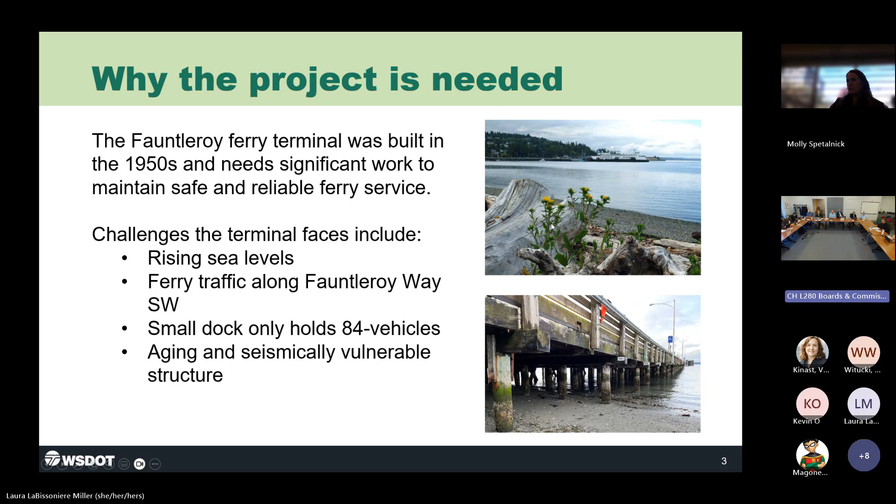We started this project just before COVID. I remember my boss telling me, we're not going to take 10, 20 years to design this project like we did your Mukilteo project. No, we're going to do this one really quick. I just nodded and said, sure, we will, because I know things happen. I didn't know COVID was going to happen. I didn't know the West Seattle Bridge was going to start cracking. I didn't know all these other things. But things just happen on all these projects. As long as I've worked, stuff happens.

So we want to go quickly, and we can only go as fast as we can go.

Before COVID happened and we began the project, we put this long range plan together, and this is what the team aims at. We figured out what vessels were going to be assigned to the route in 2040. We did our traffic predictions of what traffic would be like in South Kitsap, over in Vashon, and in West Seattle. Then we took that information and gave it to the design team and said, this is what you're aiming at—not 2050, not 2090, 2040, just aim there. Things get fuzzy if you look further ahead than that, even though the structures we're putting in here, made of steel and concrete, are going to last 50 to 75 years.

Our design is based on the 2040 long range plan.

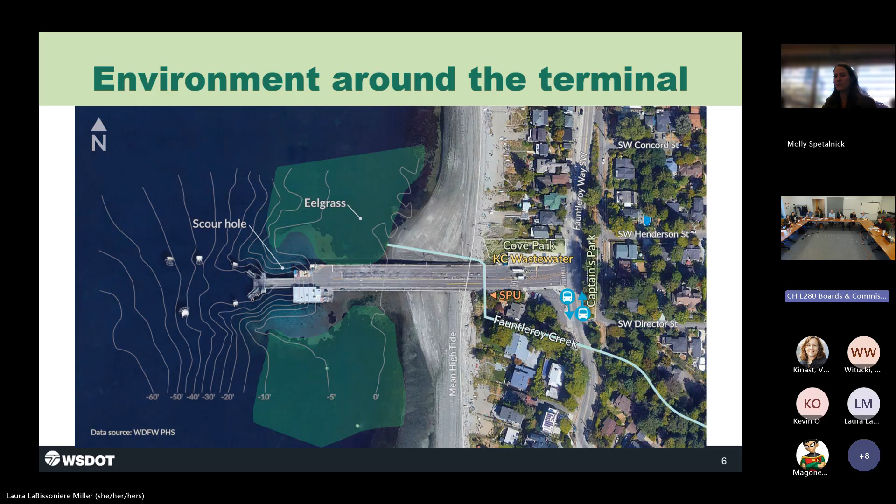And we have nice homes around there. It's a little quiet area. I mentioned Cove Park is right there on the opposite side of the street, the east side of the street, up on top of the bluff. Captain's Park. And this one, and I'll turn it over to Laura.

Thanks, Charlie, for setting the stage and the context. And we are going to get into the alternative that Washington State Ferries has selected to move forward.

But before that, I wanted to speak a little bit about the community engagement process so far. Charlie mentioned that this route serves 3 communities, so 3 million passengers who travel through the Fauntleroy Ferry Terminal each year. Those communities are very different from one another and have really different needs. So we're serving Vashon Island, which is an island dependent entirely on the ferry system to get to medical appointments, work, places that they need to go. They rely on that service. And we hear from them loud and clear. We hear a lot from them and do a lot of work with the community.

We're also serving the South Kitsap Peninsula, so an increasingly diverse area, a lot of people moving out to that area. We really see the ridership increasing from South Kitsap Peninsula and coming into Seattle, kind of a split between south and north. So they're coming to Fauntleroy, but they're going in all directions.

And then, of course, as Charlie mentioned, the environment around the terminal. This is in the middle of a residential neighborhood. This is the only terminal in the system where the connection is a local arterial. So you think about the neighborhood and people currently that have traffic coming along in front of their homes. There's driveways along Fauntleroy Way, and this terminal has really become part of the fabric of the community and a part of the neighborhood.

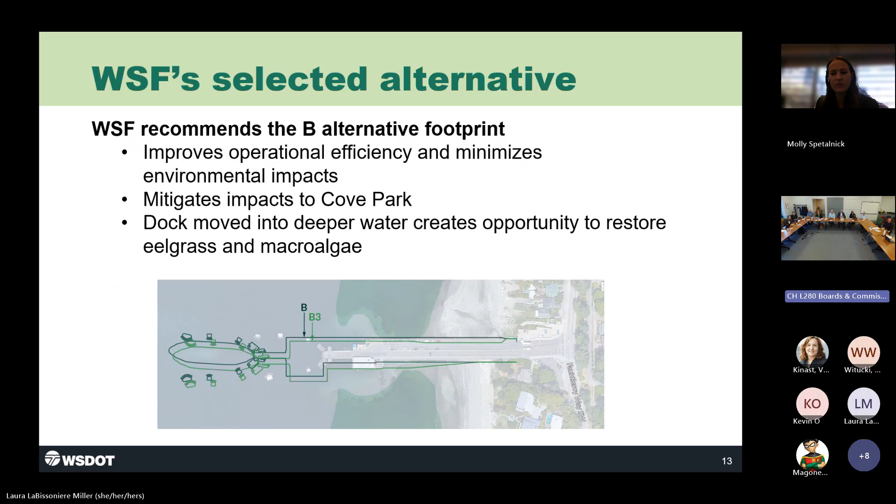In general, we're moving forward with the footprint that best improves operational efficiency, as well as some other factors, which I'll get into in a moment.

As I mentioned, those B alternatives we're basing the footprint on are fairly similar. By the time we get to level 3 screening, a lot of the screening criteria and performance factors we were looking at are all met across all of the alternatives. Level 1, level 2, we've already screened out a lot of the things that have critical flaws.

So all of the alternatives we looked at, and certainly what we're progressing forward into NEPA, meets some of these key needs: to replace the dock at the same location, and accommodate the number of vehicles requested by the design manual, in a combination of on-dock and shoulder holding up Fauntleroy Way as it is currently.

The new design will meet the seismic design standards, accommodate sea level rise, and be designed to have enough space for large trucks to safely navigate. At the moment it's quite tight—the lanes are narrow, and when large trucks come through it can be a maneuvering challenge for operations and drivers. We'll have wider lanes that give more space for various modes of moving across the trestle.

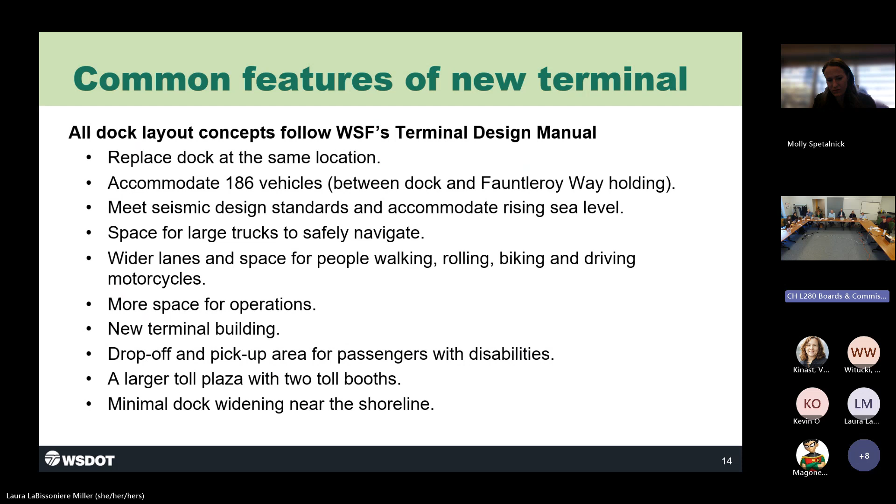It gives more space for operations, a new terminal building, drop-off and pick-up areas for passengers with mobility challenges, and a larger toll plaza with two toll booths. Again, minimizing any widening at the shoreline prevents impacts to that nearshore environment Charlie was mentioning.

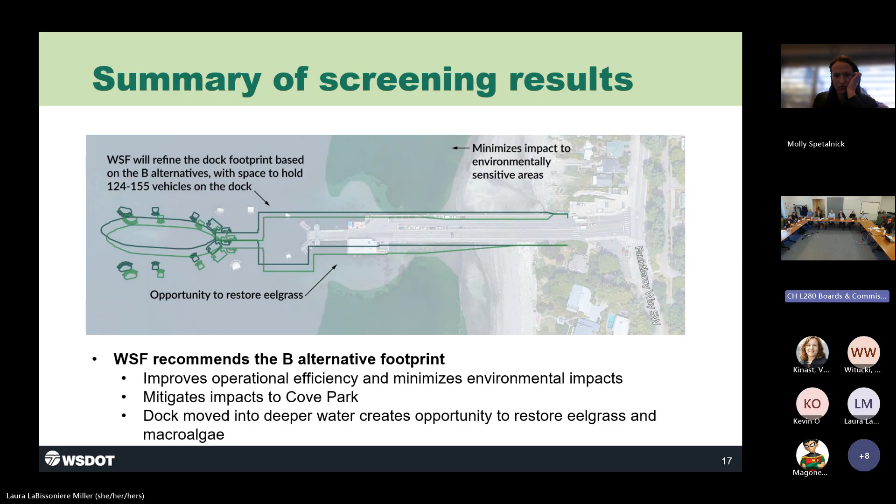That's based on all of the screening criteria we just looked at, but also included traffic analysis. We ran VISSIM models of each of these alternatives, which is a traffic model, just to see how vehicles of various modes load and unload, also considering the lane configurations and how they sort on the trestle. Yes, that's some of the key features of what we're progressing.

As part of this, as Charlie mentioned, we identified the opportunity to improve the intersection at the terminal entrance where it connects to Fauntleroy Way Southwest. As Laura mentioned, it's an arterial street, with neighbors along there whose driveways drop out into Fauntleroy Way. Currently that's an unsignalized, uncontrolled intersection. WSF has a uniformed police officer out there during peak periods to help direct traffic, since people leave the terminal wanting to go both left and right, north and south. There are a lot of school kids and buses that come through there.

So we'll be installing a signalized intersection beginning later this year. That design is currently about 60%. We're working closely with Washington State Ferries, their WSDOT traffic contingent, SDOT, and various SDOT departments. It will be a single signal pole with a couple of mast arms. We've designed it to avoid the hillside you see there with Captain's Park on top - that was one of the key aims of the project, to avoid any impacts to parks. There are also culturally sensitive areas around here, so we're minimizing that.

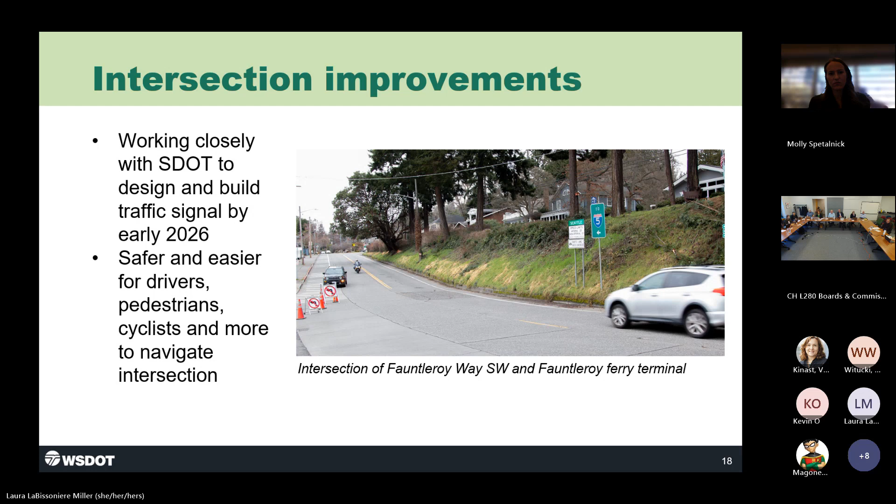I'll add that the intersection is owned by the city and will be managed by the city. We're using their design criteria and they're reviewing our submittals, just to fit in with how the city wants to manage traffic along Fauntleroy Way.

On the modes, the trestle really gets longer as opposed to wider, but the little widening has to do with the 2 bike lanes we're adding. Currently, the bike lanes go in and out of the exit lanes, and sometimes people use the exit lanes to drop off a walk-on who needs to get to the front. So there's cars going back and forth in that exit lane, and bikes and motorcycles going back and forth too.

We've probably had a few close calls, and that's something we said just isn't right. Let's give a dedicated bike lane to enter and a dedicated bike lane to exit. So we've added 8 or 10 feet right there, and we're not going to let motorcycles go back and forth in the exiting lanes anymore - we're going to give them their own entry lane to queue up. That's about 15 feet wider, just to accommodate those 2 extra modes. We think it's the right thing to do - safety was a big issue we talked about. That's our justification for widening it a little bit, not just because we want to put more cars on the dock.

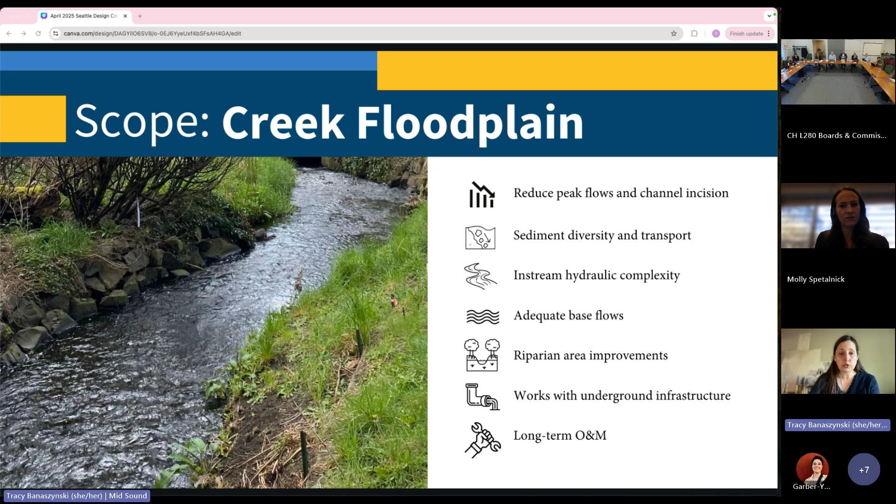Community access has always been a critical part of this project. Lake City is an underserved neighborhood that lacks access to green spaces, and acquisition of this formerly private property created an exciting opportunity to both restore the creek and connect a diverse community to a healthy natural area. Some of the major goals for park amenities are to create a sustainable passive park where residents can immerse themselves in nature without leaving the city, celebrate the diverse Lake City community in the design, limit impervious surfaces, as this park is entirely within environmentally critical areas, and promote safety through environmental design and enhancing visibility from roads and nearby properties.

Okay, here we are. The project site is located on Northeast 125th Street between 23rd and 24th Avenues Northeast. It's west of Lake City's Civic Core, about 4 blocks from Seattle Public Library's Lake City branch, very walkable. The neighborhood is also incredibly diverse, with high percentages of BIPOC and immigrant communities and health disparities. One of the reasons this project is so exciting is that it's at the nexus of improving habitat and creating a community asset in an area that has a real need. This project will make a meaningful difference to the Lake City community when it is fully constructed and accessible to them.

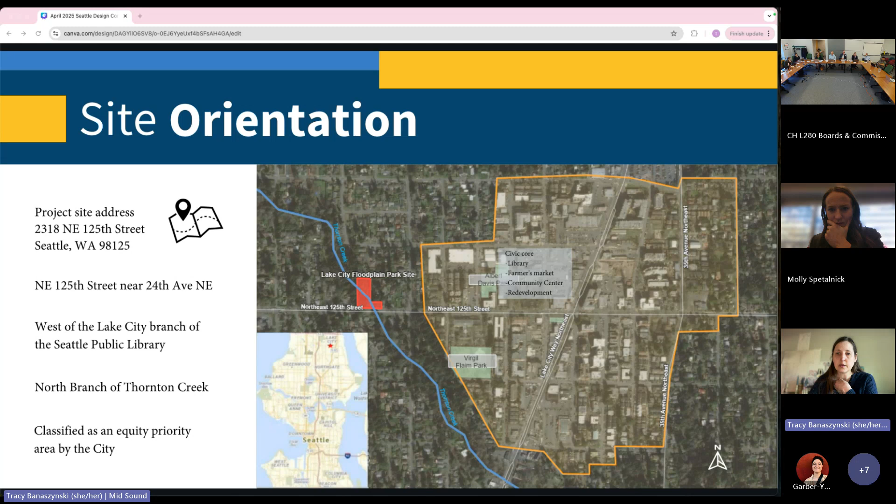So the immediate surrounding context of the site is a really important element that poses both design opportunities and challenges, so I wanted to highlight it here. It's bordered by private property on the north, west, and most of the east side. There's no through street bordering the north end of the site. You can see that the street up on the north doesn't even approach the north border of our site.

Current access to the property is from Northeast 125th Street, which is a busy arterial. 24th Avenue Northeast is a short cul-de-sac street. And the southeast corner of the site, the shape that forms the L, has some of the steepest slopes on the site. So when you're standing up on 125th, you really have the feeling of looking down into the site. The slopes are that steep.

Seattle Design Commission previously asked us to explore partnerships on abutting properties for trail easements, including properties from the north, and supported a second access point with the understanding that topography provides challenges. We think both points are well made, and we did explore possibilities for easements and a second access point. Unfortunately, abutting property owners are not interested in allowing public access on their properties at this time. The city is paying attention to possible future acquisition opportunities if certain properties come up for sale that might allow for those additional trails and access points.

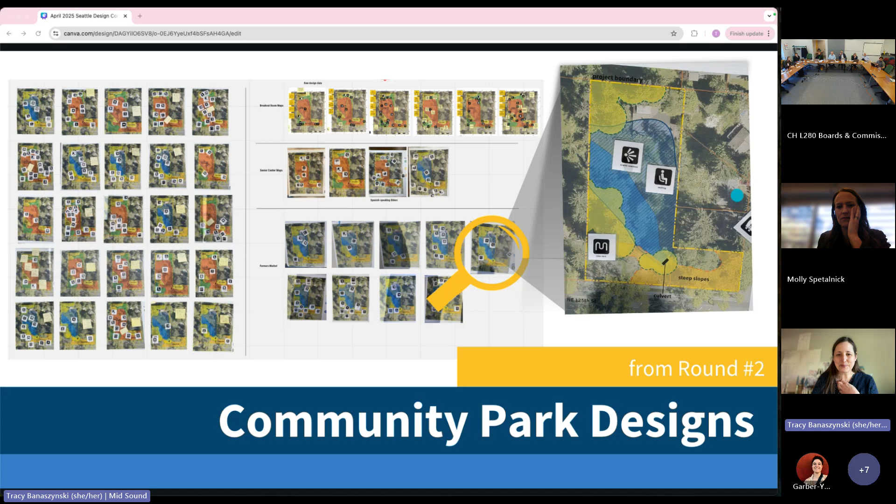Our landscape architect took all of the community-generated park designs and consolidated them into one design here. You see this diagrammatic plan. She was looking for both consensus and divergence of ideas to help us understand what was broadly important and where there was some flexibility in amenity choices for the design team.

The community agreed that there should be restoration only in the creek buffer. They weren't really excited about seeing access in the creek buffer, and it was important to limit user impacts. Everybody was very sensitive to the fact that the creek was special and needed protections.

Restoration, relaxation, and quiet were particularly important for the north end of the park. Community members who were able to be on site with us noticed how much quieter it was as they traveled from Northeast 125th to the back of the site, and they valued the sense of respite they felt while still in the middle of a very busy urban neighborhood. The community also told us we should prioritize previously disturbed areas for park amenities development instead of creating new disturbances.

The places where we found flexibility were in public art installation. The community liked the idea of art but did not express that it had to be in a specific location or of a specific type. We also had flexibility in the bridge, both its location and design, and the opportunity for future trail connections as allowed through easements or property acquisitions.

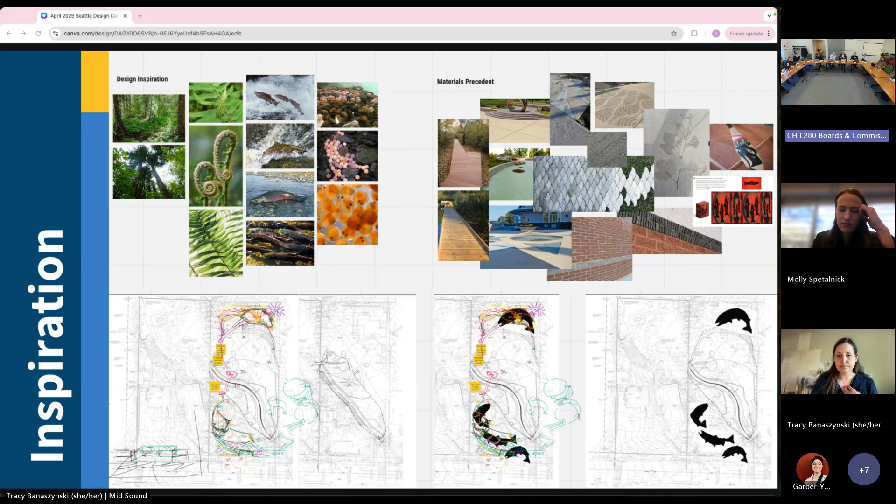So her inspiration and creative thinking, in the context of all the constraints we gave her, resulted in 3 conceptual design options that were shared with the SPR, SPU, and Seattle Design Commission. They represented 3 different levels of impact to the park.

Option 1 had the fewest public access amenities and therefore the lightest footprint. Option 3 had the most public access amenities and therefore the highest impact on the site. Option 2 was somewhere in between options 1 and 3.

City partners were happy with the design direction. However, commissioners commented that the 3 design options shown may be only one option, and that it would be nice to see the team explore other design language and concepts that might help solve some of the problems that currently exist with access and safety.

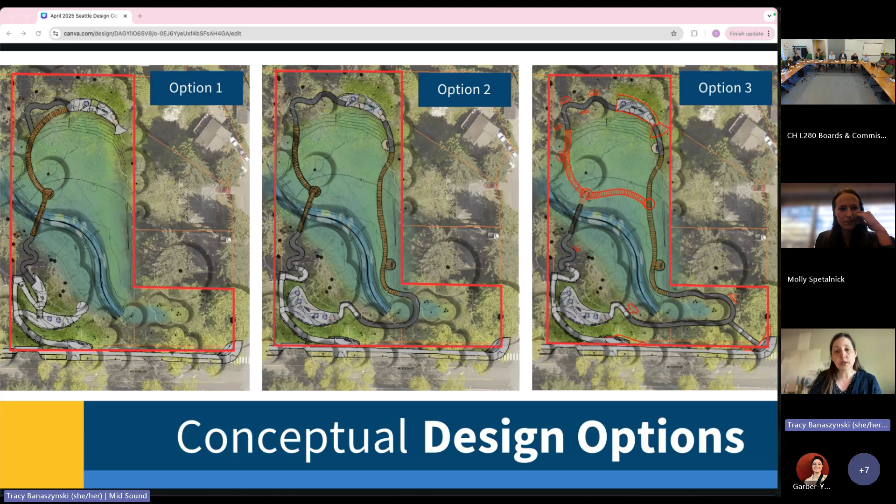So we did that. We went back to our landscape architect, gave her that feedback, and she explored other design languages. However, it turned out they changed only the form of the amenities, but did not allow us to really solve site access issues. Again, because the site is so constrained by environmentally critical areas and underground infrastructure, different design language just was not able to overcome those things. But there they are.

So city desire to advance the original concept, combined with our commitment to be responsive to our robust iterative community process, led us back to where we started. The team selected 2 of the options to share with the community in a 3rd virtual workshop and related in-person outreach opportunities. The lower impact option was presented as an opportunity to maximize quiet and solitude, and the higher impact option was presented as an opportunity for gathering with small groups of friends and family, or for meeting neighbors and community members.

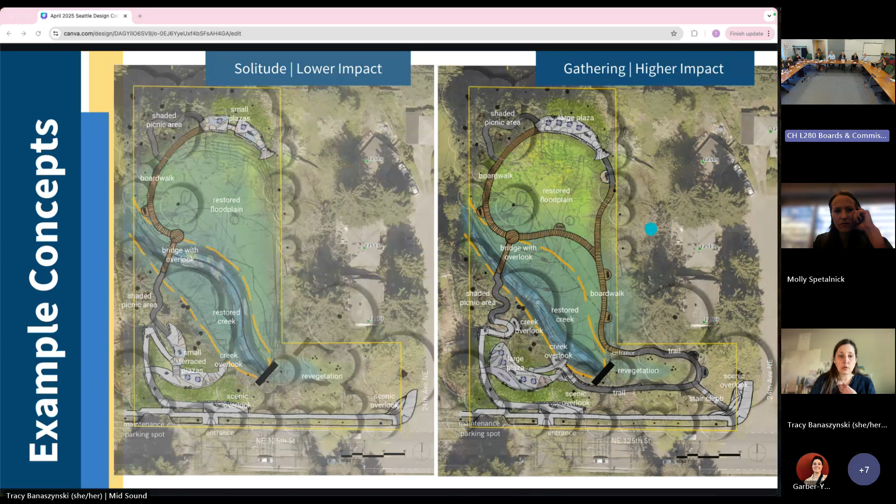This was in our 3rd community feedback opportunity. We gave puzzle pieces to community members showing different parts of the park and amenities that were, or could be, in those different parts of the park, and asked them to puzzle them together in a way that let them build their own park, but in a more constrained way, based on all the feedback we had gotten from them previously.

Our landscape architect was looking for points of consensus and points of divergence. Things we found were important to the community: a loop trail, seating, accessible trails. The bridge was important to them—they really wanted to be able to travel back and forth throughout the site. They didn't want to have to stay up front to the south by the street. Gathering was really important to them. The trails were important. The creek continued to be very important to them.

The things where there was pretty even division in the community were how the loop trail should look, and whether there should be a central trail connection across the north side of the site. The community was really divided on access at the southeast corner of the site, where we ultimately decided that the critical areas and other constraints made it kind of impossible. The community, I think, was also grappling with that as well.

And the size of the plaza in the back of the park was also something the community was divided about. Some wanted it to be very small, and some wanted it to be larger. So we felt we had some room to play around with that.

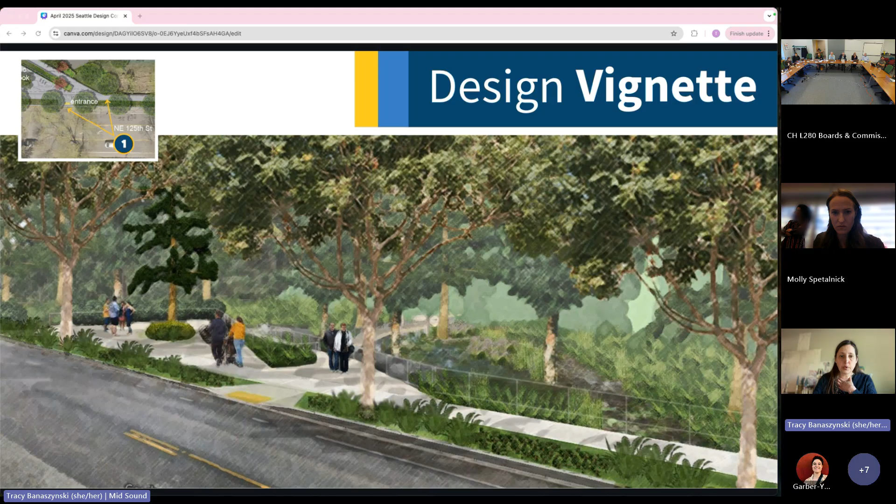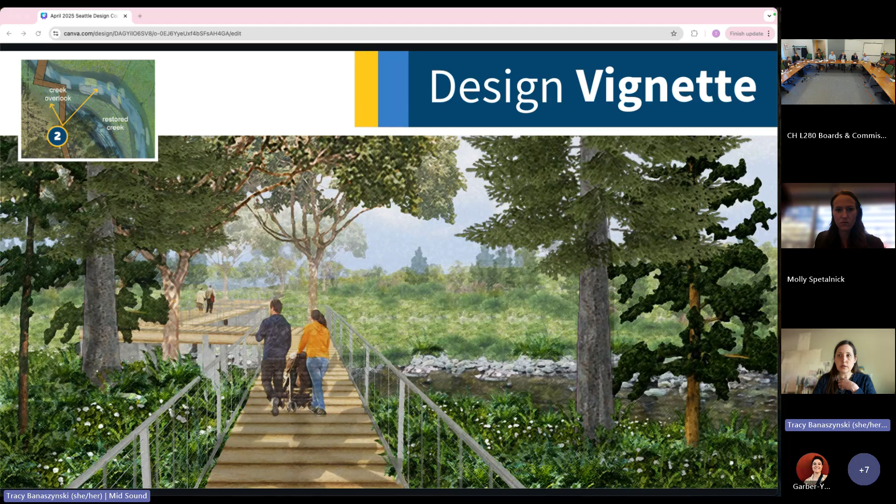This one shows how the park might feel if you're entering it. This is still on the south side of the creek, but well into the park off of the Gathering Plaza onto the boardwalk. You can see the back channel, those things that look like rocks, which is part of the back channel of Thornton Creek we're designing, to the right. The bridge over Thornton Creek is over there on the left.

Finally, this vignette shows the park from the perspective of someone standing on the North Plaza, looking back toward 125th, sort of to the southwest. It really is amazing how much quieter it is back there. The sound from 125th melts away, and there are lots of birds and other critters making nice nature sounds.

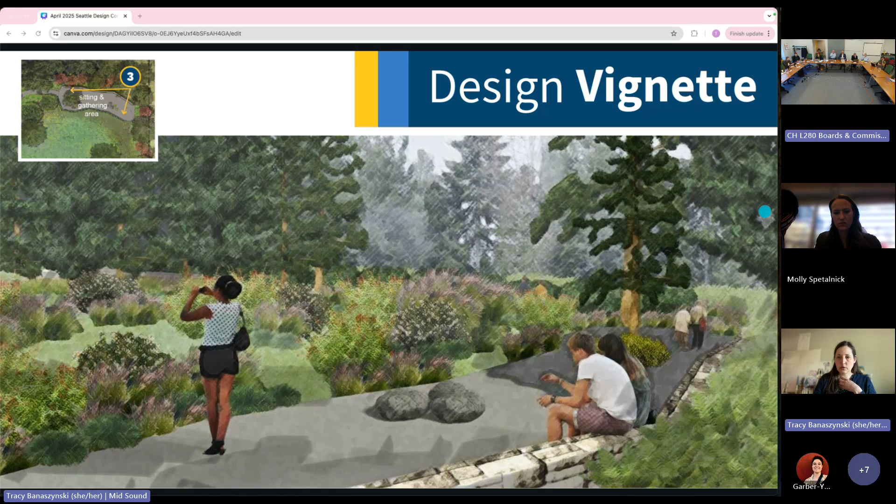I'm really glad to see more wood reintroduced in our urban systems, because I think it's important and beautiful, and more people will come to feel the same when they have an opportunity to experience it and become curious about why we're putting it back into our rivers and streams. This is also a way to say I don't have a lot of nice built things to show you. There won't be a lot of that, but there will be a lot of beautiful natural features.

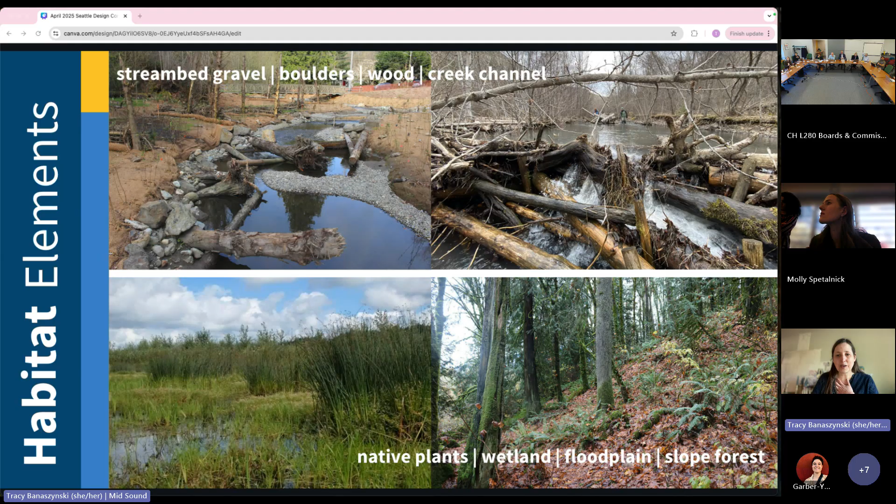Last time we were before this body, commissioners recommended that SDOT be included and engaged in all right-of-way solutions for access and circulation, including crosswalks and other right-of-way improvements. We agreed and have been in communication with SDOT since early in the design process. We're fortunate, it's great synergy, that our project site is within their improvement corridor. They currently have this Northeast 130th to Northeast 125th corridor improvement project going on, which is allowing for right-of-way improvements that probably would have been out of budget and scope for our project.

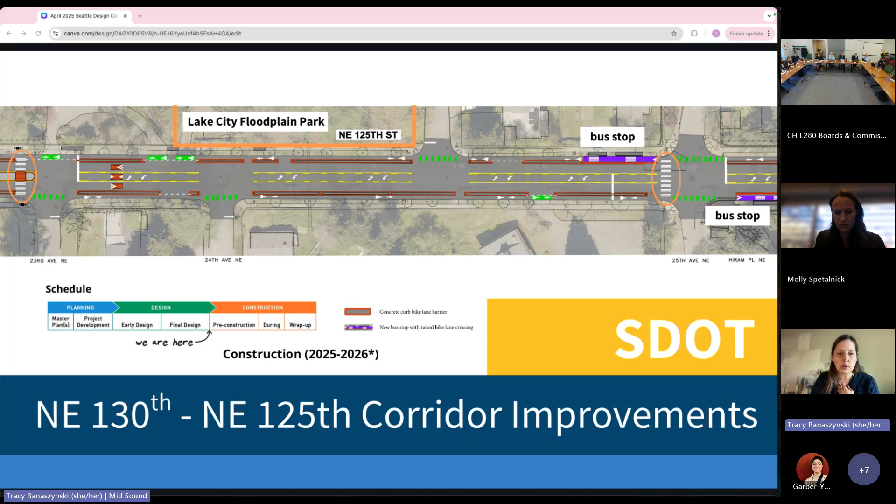All the plantings will be native, and placed with sensitivity to their growing needs, so we get the right plant in the right place. We have lots of wetlands on site, and we'll have some beautiful emergents we'll be able to put in. Lots of ground cover, bushes and trees will go in. Native conifers will go in.

The plants will be designed to maximize habitat, while also providing sight lines in and out of the park for visitor comfort and safety. So we're balancing two things: for habitat reasons, the creek riparian area needs to be well planted, to cool the water, provide nutrient inputs for fish, and other habitat reasons. And we also need people to feel safe in the site, with sight lines from 125th that allow people to feel safe and be safe. So we're going to balance and manage those two things to the best of our ability.

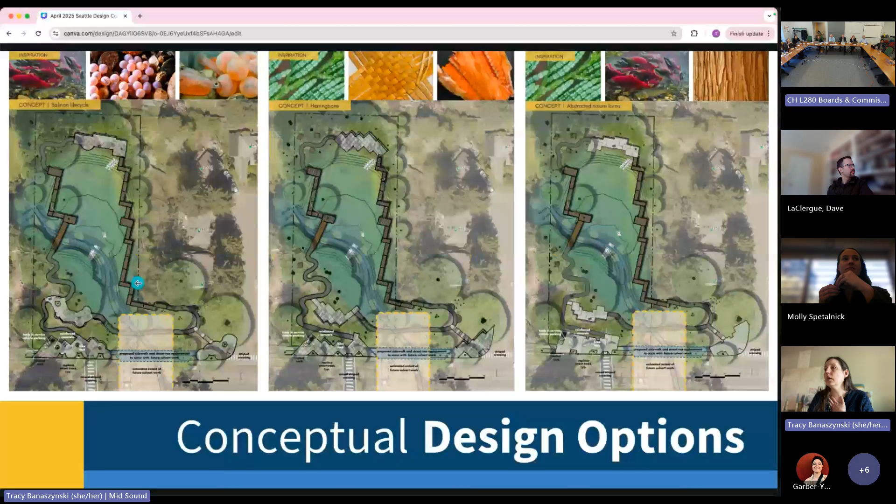I think they're concerned about the wetland too, which is different. That's shown on one slide more clearly. Yeah, the wetland is further. Please take this wetland area as approximate. I just put that in there based on looking at another map, so this is not necessarily where the wetland is delineated, but it is an okay approximation.

So the Muckleshoot input is avoiding the wetland, not avoiding the full restored floodplain, is that correct? Yes, that's correct. Okay, I'll send it back your way. I'm good, thank you.

I actually don't have— oh, I said, right, you weren't here before. Did I answer the second part? I knew you were here. No, you don't get a question. Did I answer the second part of that question? I just want to make sure I did. Yes, you did incorporate it. Okay, absolutely, great.

I do have a question. So, so it's clear, understood—thank you for putting this slide up—the differentiation here, and understood the wetland boundary is not 100% accurate, but there are different designations on that versus a floodplain. The alignment of the trail or the boardwalk, is that on the west side of the project? Is that of concern as well?

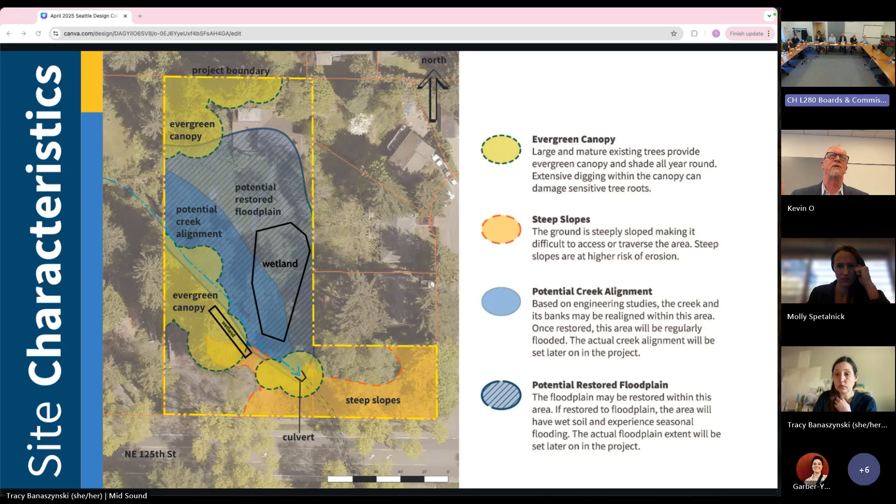That's plenty, thank you. And then just one more quick question on a totally different topic — I noted on the 125th corridor improvements that there's a protected bike lane, which is great. Is there bike parking incorporated into the gathering area?

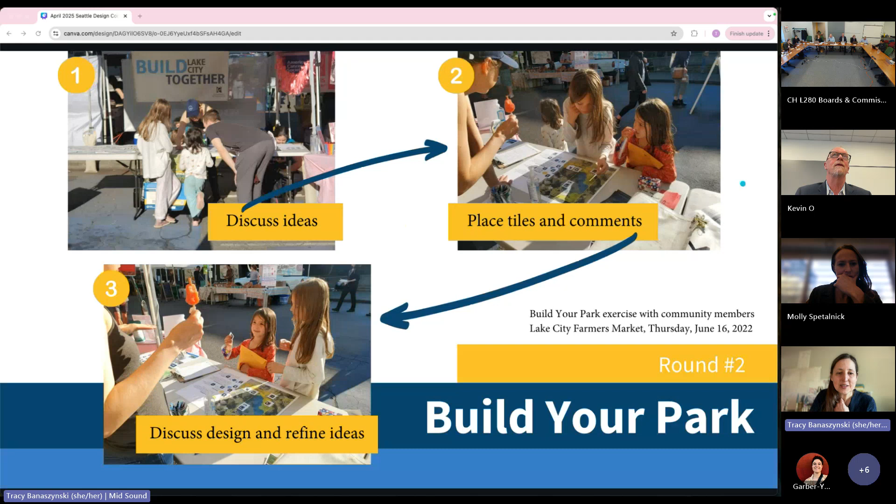People really wanted to see a bike rack — that was like one of our most frequently mentioned park ideas, so I think we will put something at the front of the park. Yeah, you can see how it was this. I'll have a comment about that, but I'll defer to later. So yeah, those were the only questions I had.

Thanks. Okay, so I'm hearing two different philosophies at play: one that treats nature as something we observe quietly and respectfully from a distance, and another that invites us to engage more directly through access and education. So my question is, what kind of relationship with nature is this project trying to promote, and what environmental ethics is at the heart of that vision?

That's a good question. I don't know that we've had that explicit conversation on the project team, but I would say the direction it has gone does not treat nature like a museum. One thing Parks and SPU could have decided was to just put an overview up on 125th so people could look into the site but not access it — that was never a consideration. It was always very important that the community have access to the site. So I'd say this project is tending much more toward wanting people to engage with nature in a respectful way.

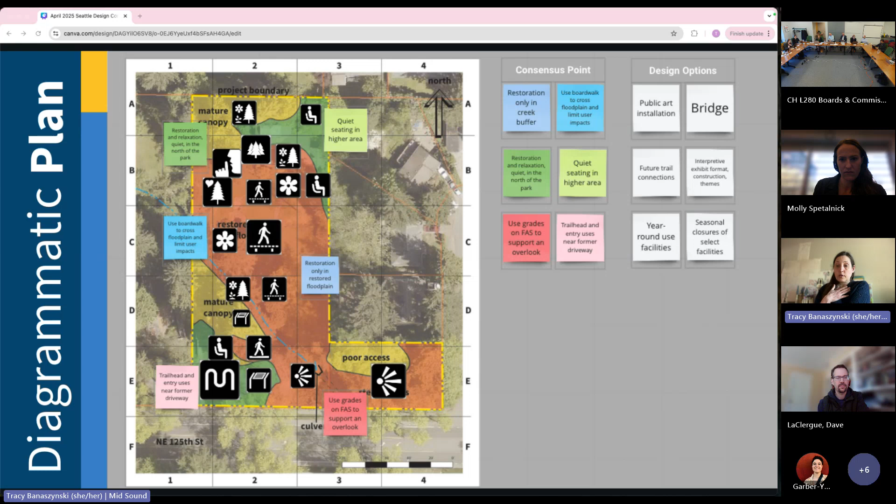I know because we've had lots of conversations that our landscape architect is very mindful of the fact that we will not be using tribal imagery without coordination with the tribes. Right now, we are not appropriating anything from tribal culture as a design element, and we would not do that unless we were consulting with tribes and they wanted us to. So any nature elements in the park will be common ones, not associated with tribal art. Does that answer your question? Yes, thank you.

To that, we're in ongoing conversations with the Office of Arts and Culture about whether we're going to have custom art through the 1% for Art program within the park. There's likely to be something at the street level as part of the 125th corridor project, and it seems like a good opportunity to have art down on the site also. They've talked about reaching out to Native artists as part of that process if we have a 1% for Arts project, but the final outcome isn't decided yet. I'd reiterate what Tracy said: we're not going to use tribal art motifs unless it's a Native artist designing that work.

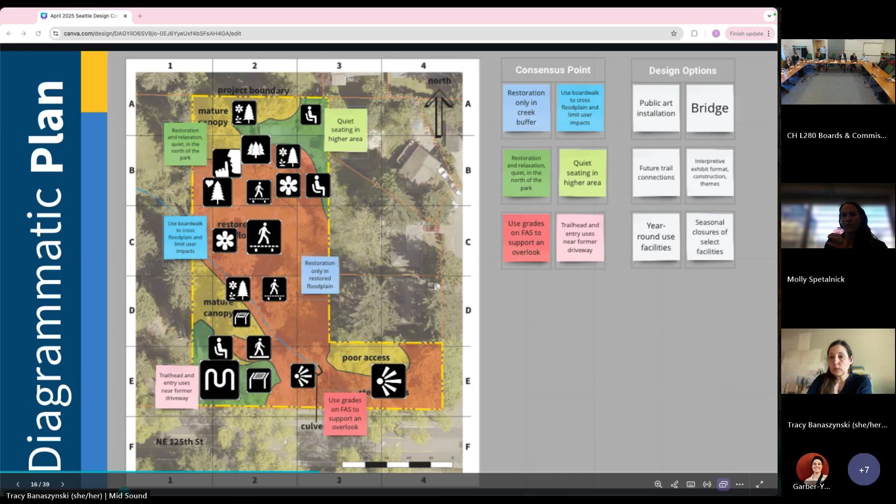I don't know if we have a specific one, but let me see. Let me pull this one up here. No, I don't think I have a great diagram that speaks to sightlines and what exactly will happen. I think maybe in part because it will depend on the exact planting plan, which is still just at 60% and evolving. Right now it's shown that bushes, shrubs, and lower growing vegetation would be planted right along the creek bed. We're considering that it's great for sightlines but not great for the creek, so we're still discussing where we could plant a few more trees while still maintaining sightlines. It's an ongoing conversation.

Okay, thank you. Another comment last time was about safety being enhanced through size and scale of circulation as well as site lighting. We covered the size of circulation passageways—do you have any more information about site lighting?

There will be no lighting in the site, in part—I don't know exactly why. There's Dave and the SPU and Parks team, do you remember why we made that decision? There are existing streetlights in front of the property along 125th. There were discussions about the main entry plaza right off 125th having some additional lighting, but so far internally our departments haven't discussed it being a good idea to light the back of the site. A lot of it has to do with the neighboring properties, park and nature area use hours, and environmental habitat lighting. So we could still entertain some low-level lighting in some way, but internally our departments have pushed back against it so far.

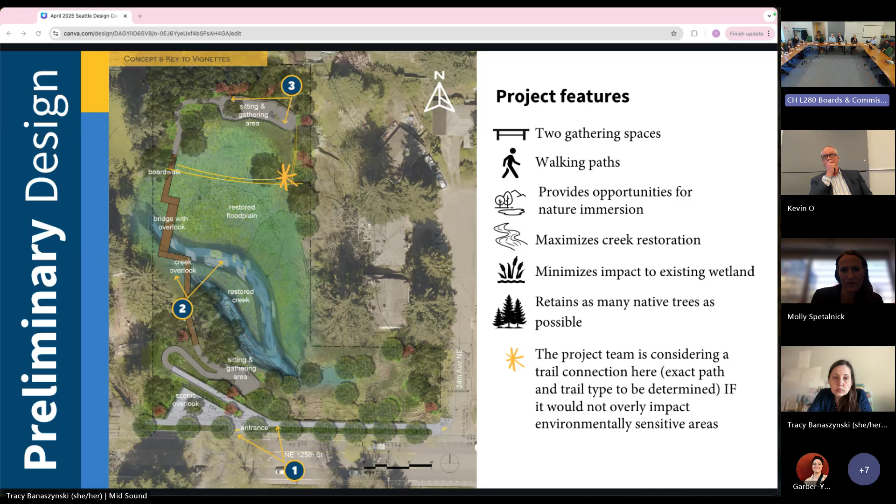First and foremost, I think it's the loop. I did see that one diagram where there's this diagrammatic sketch, but there's actually a permitting drawing—could you put that up really quickly, Tracy? Even the planting plans. The planting plan seemed to show it.

And that shows actually a more robust loop strategy, which delves farther into the floodplain and closer to the creek. I'm not sure—so we would love to see that study of the loops and how you're ending up with that, with the understanding that it 100% cannot be in the wetland or the wetland buffer. So we're understanding it as a floodplain loop, not a wetland loop. But we want to see that study.

And again, like Ray just said, the acknowledgement or understanding of what can be permitted—so we understand this has gone in for permitting and what is actually allowable, because that helps us help you understand the best way to move it forward, and if it can be moved forward at all.

I'll move on to planting. I think this was the planting plan you shared. We'd love to see understood native species, and thank you for sharing the strategy of not having trees, for instance, at the culvert for phasing opportunities. But we'd like a more robust explanation and detail of what plant species you're using and where, and it can be broad brush. Right now we're seeing actual plant symbols, but it could be something that gives swaths of where you expect lower plants, where the punctuation of higher plants is. That's one, to understand the planting and design intent, and two, to understand sightlines throughout the site.